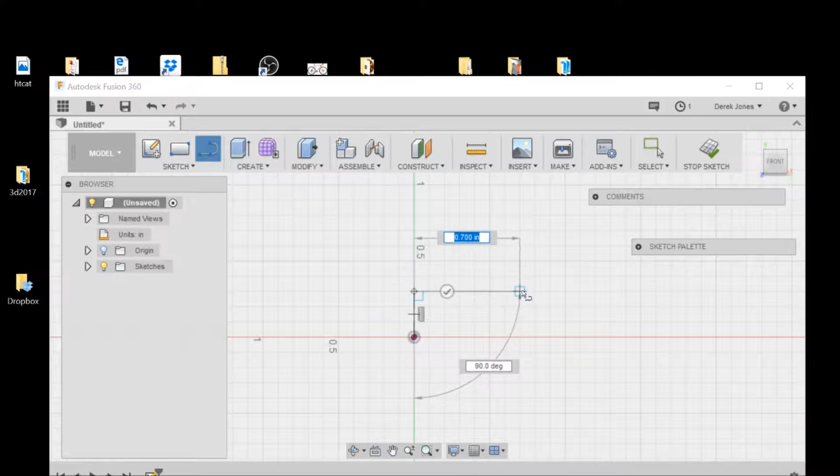What I'm going to do is draw some lines, and we're going to work on the front plane. The first line I'm going to draw is going to be right there, and I'm going to go 300. Then I'm going to come out 0.4 of an inch.

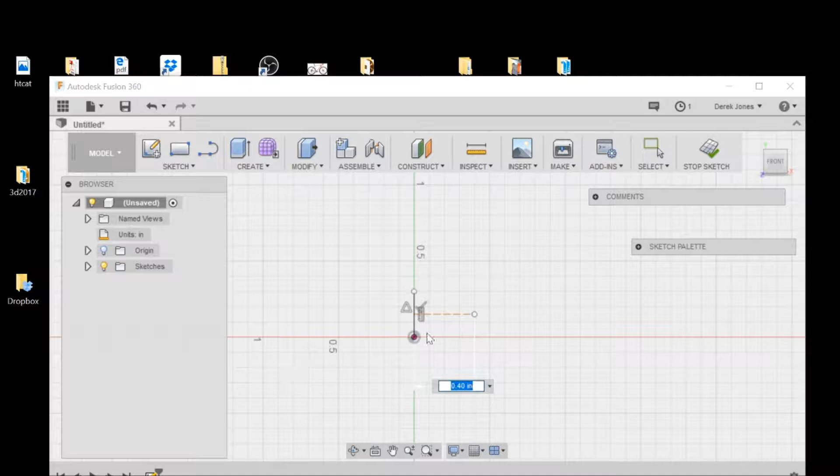What I'm going to do is turn this into a construction line, and that just means it's a measurement line. Then I can go sketch dimension, and I know that it's 0.4. So there's the first thing that I'm going to do.

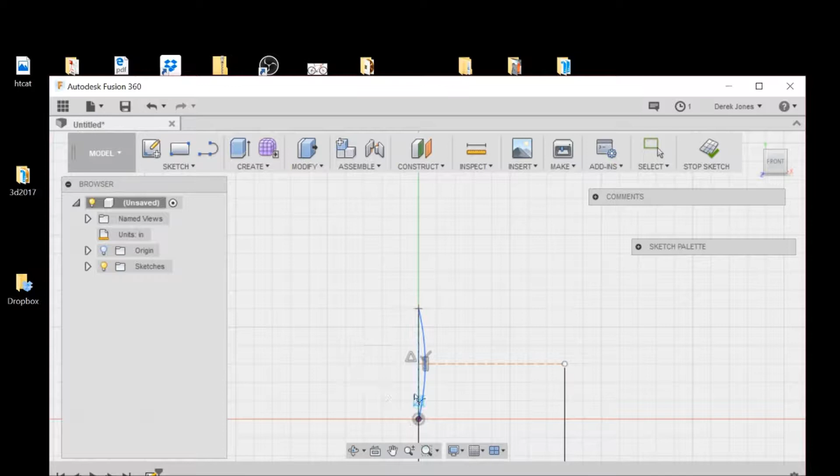Now what I want to do is a 3-point arc, and I'm going to click here and here, and I want this to have just the slightest bevel right there, and you will see why in a minute. I'm going to do it again on this side, but it's going to be a lot wider.

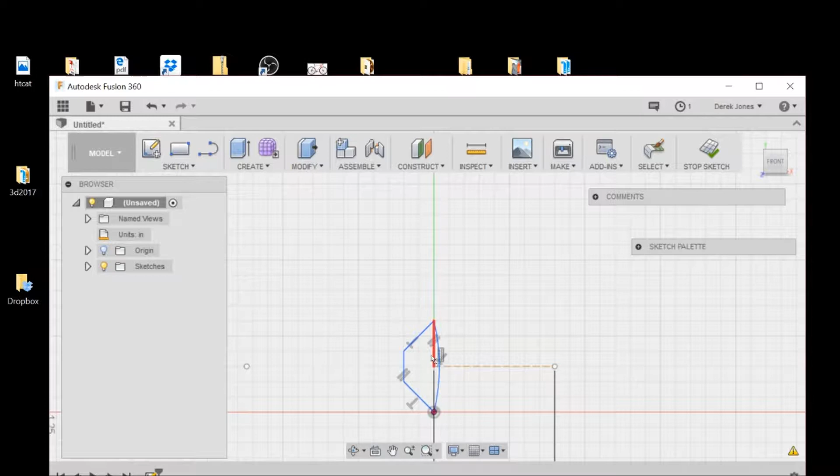Actually, I want to do something different, so I'm going to do a line. You'll see why in just a second. Okay, and then I'm going to come back and trim this line out, and I'm going to sketch another line here, and you will see why in just a second.

So what I've learned when making rings in the past is you've got to have a bevel, or your finger will not come back out.

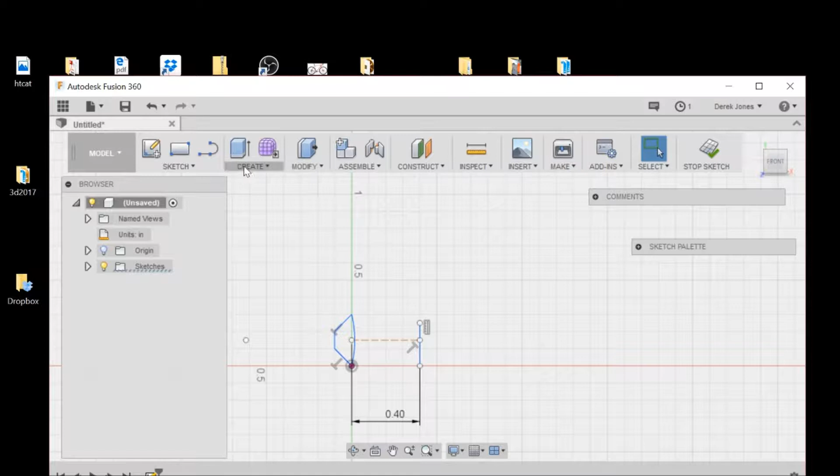So what I want to do now is go to Create, Revolve. I'm going to select this piece as the profile, this piece as the axis. This is a one side new body. Boom. And there is our ring.

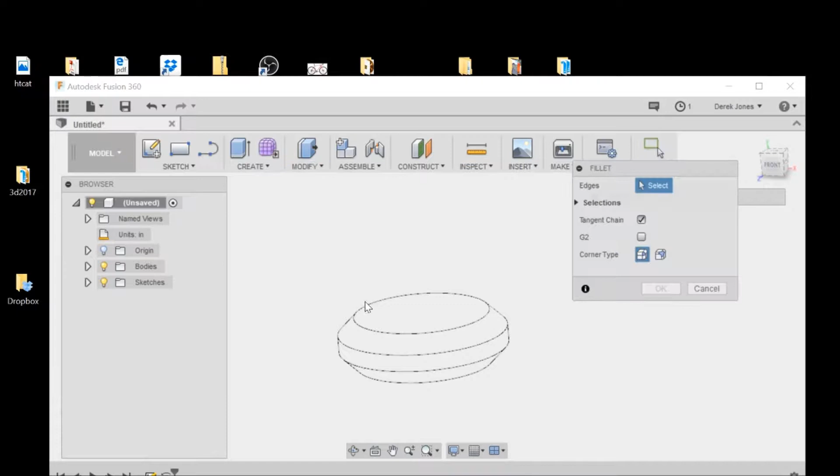Now I don't like these sharp edges, so I want to get rid of those. So I will come back to fillet. I'll click that piece and that piece, and I'm just going to take a little bit off - and that's too much. I don't even want that much, so I'm just going to do 2, and that is perfect right there. That is what I want.

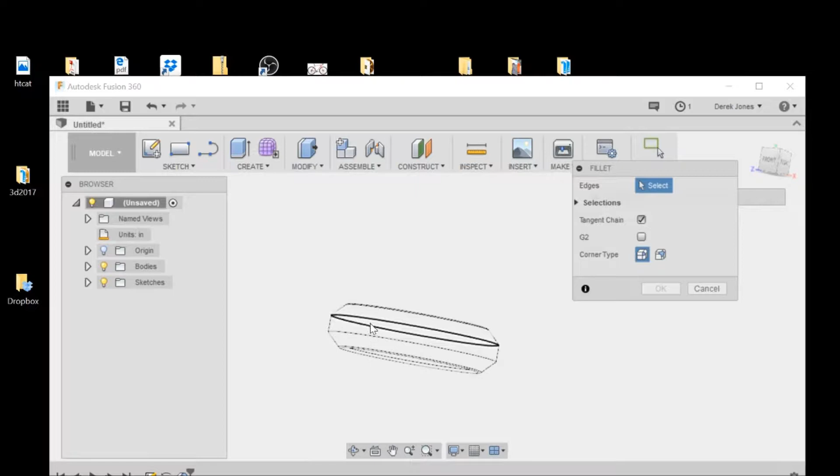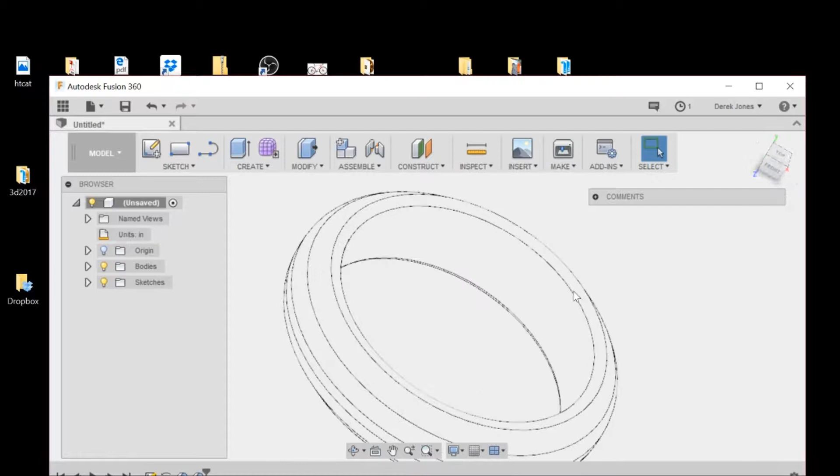And what I'll do now is go to modify physical material, and I'm going to click on metal. Just because I'm not actually working with gold, but it looks cool in gold, I'll scroll down here to gold. I'll drag this over here. Then I'll close this, and we will go to render.

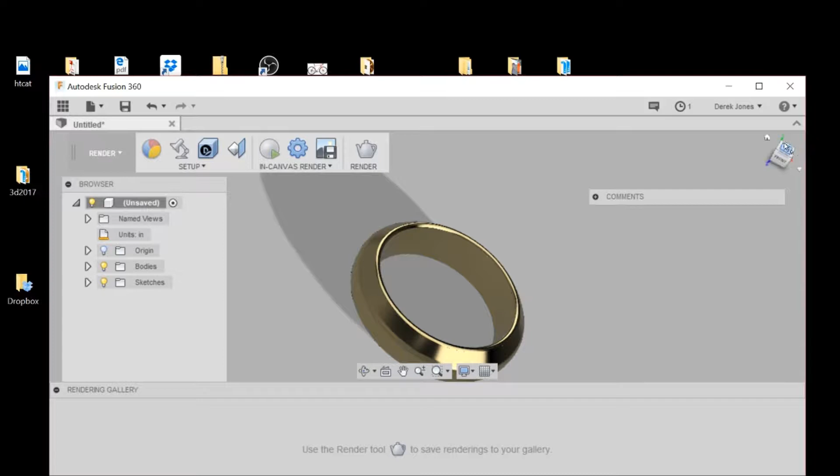And this will show us what our ring - this is what the mold is going to be built around. So let's go back to model now and go to the top, and we'll bring it back to its regular orientation. If you want to look at it from the home view, it's a very good looking blank. So I'll rotate this back around.

Now what I've got to do is go to right click, new component, new component. And from bodies, I want to go create component from bodies. So this body, the third one that I should have done first, is the actual ring, so we're going to name that one ring. Then we're going to click on this one - it's going to be bottom. And this one's going to be top. So we've got three components.

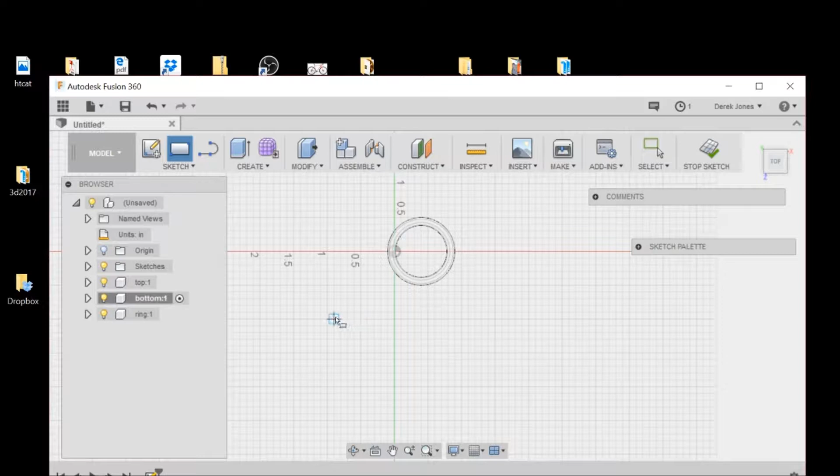Okay, now for the bottom is what we're going to work with next. I want to go sketch, rectangle, 2-point rectangle. I'm going to work from the bottom plane. And I want some room, so I'm going to go about here, and I'm just going to try to make it fairly equal - 2 by 3. Let's do it.

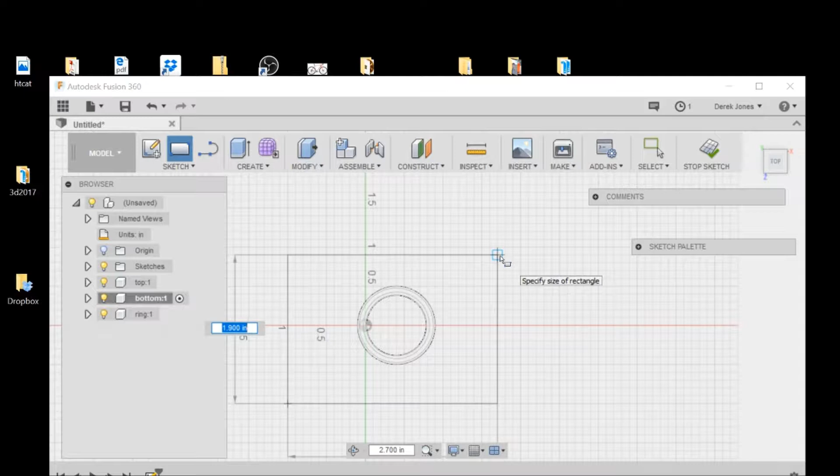That should do it right there. Okay, so this you can see is underneath our ring, and we're working from the bottom.

So now I want to go to modify, I'm going to press pull. I want to go negative 25, or let's just go negative 30. That gives us some room to work with.

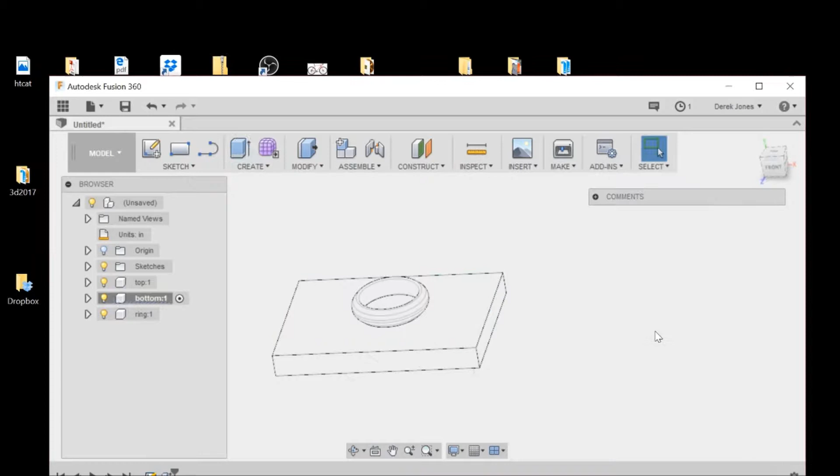So there's that one. And then I want to go to press pull this side, and I'm going to bring this up 0.15. So that's halfway of our 0.3 ring.

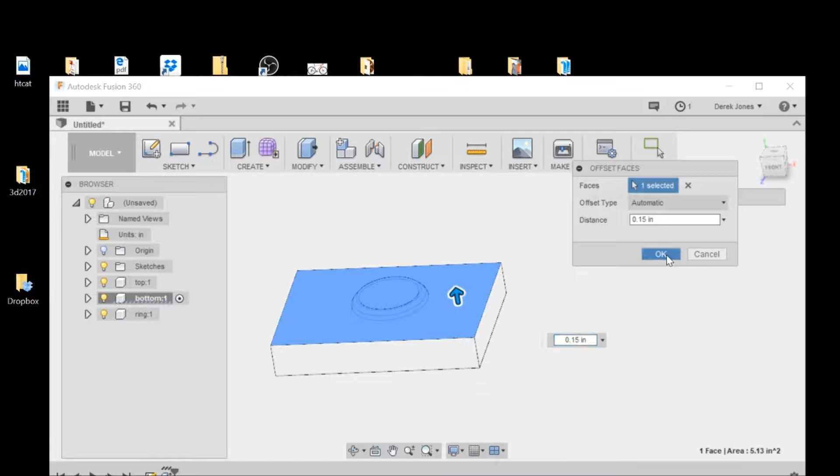So we'll hit OK, and there we have a bottom mold.

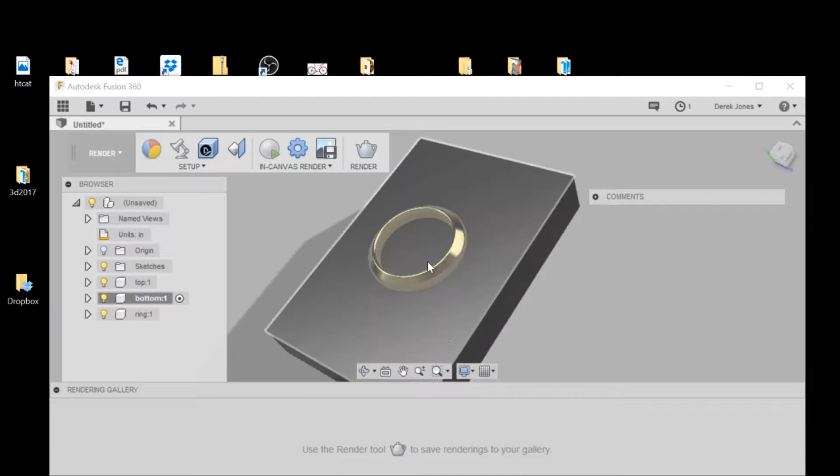Now, there's two ways I can do this. I'll show you what I think is the easiest way, and then we can go from there. If we render, you will see the ring is sitting halfway in this mold. It looks like something from Lord of the Rings or I don't know. But anyway, we'll go back to model.

Okay, so now I want to go to top, and I'm just going to draw these out first. Go to sketch, rectangle 2-point.

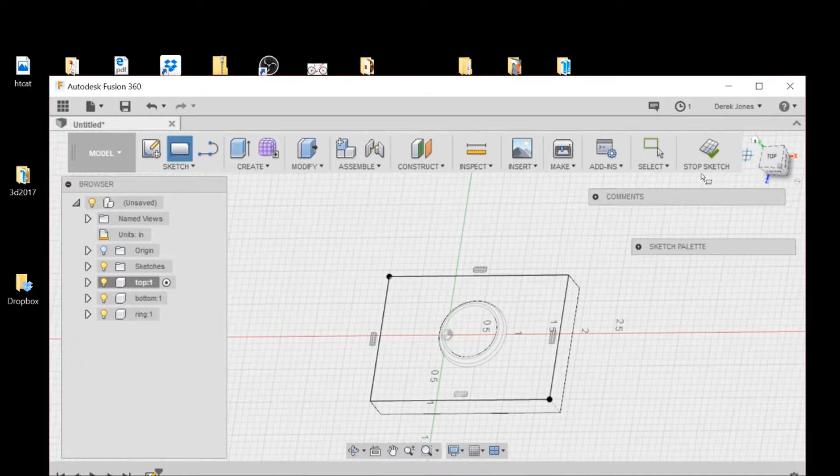I'm going to click on the face of the bottom, drag the corner, going to match the distance, the size, length and width of the other one. Go to modify, press pull, and I'm going to bring this up 0.45.

That gives it roughly equal mold size and enough strength to do what we're doing.

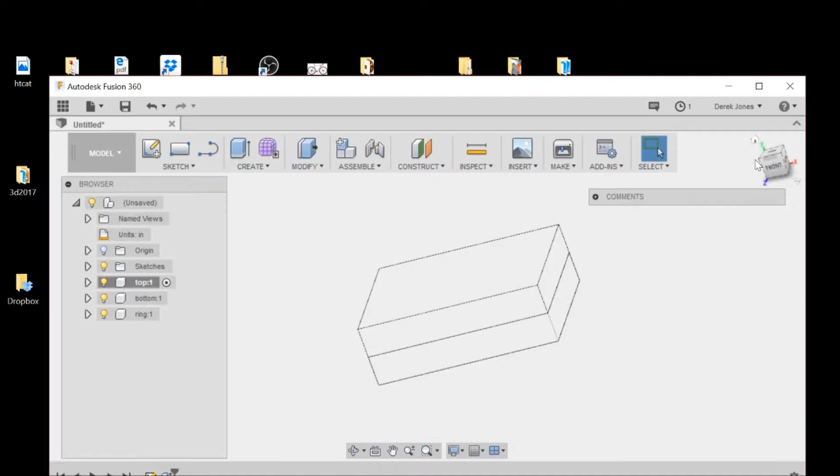Okay. So now, before we get too crazy, what I want to do is come back to the top, and I'm going to add some pressure retaining holes.

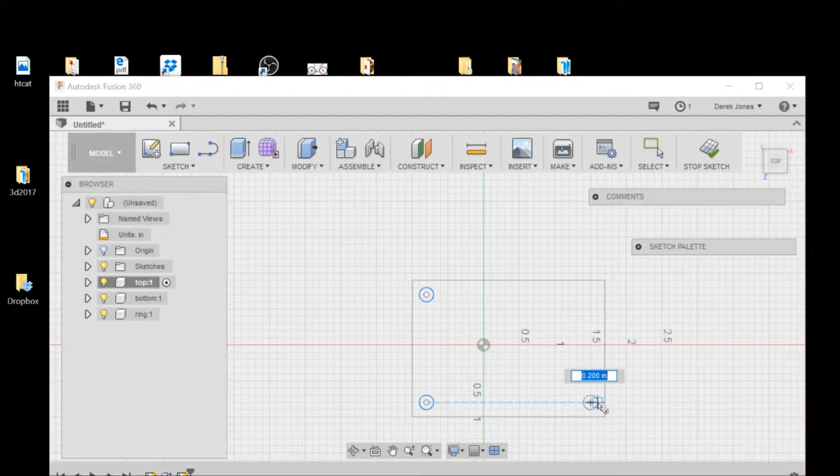200, 200, 200, 200. And I want to modify, press pull this one, this one, this one, and this one.

And what these are going to do is allow us to clamp the mold shut, and this will help us keep the cavity. All right, so we've got our holes all the way through now.

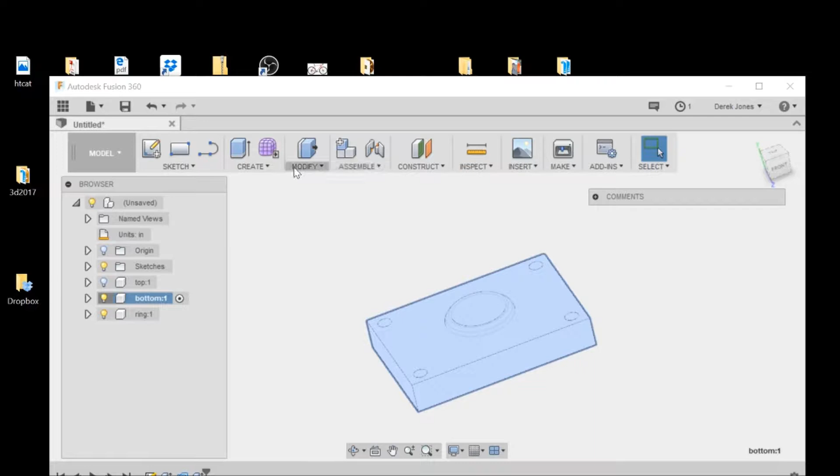Let's get rid of the top for a second, okay? And we're going to go back to the bottom. Now, what we want to do is go to modify, combine.

The target body is the bottom piece. The tool body is the actual ring itself. We do not want to join. We want to cut, and we want to keep components, keep tools.

Okay, so we'll hit OK. We want to keep tools, so we'll hit OK. Now, if we blank out the ring,

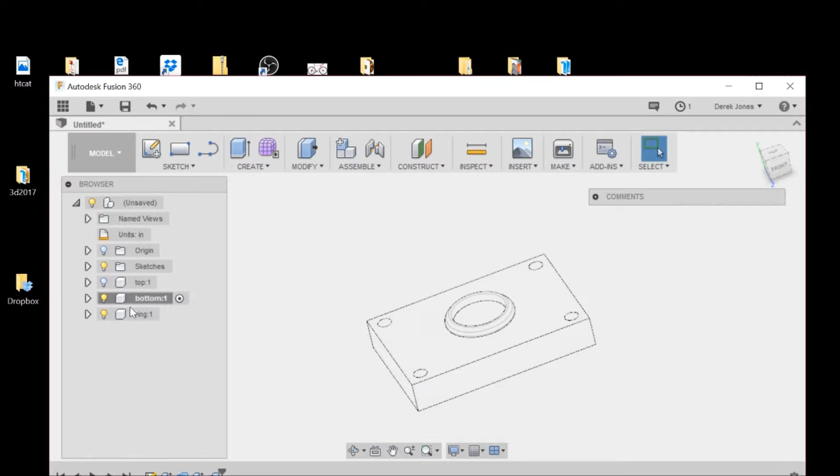You can now see the cavity that the ring is supposed to go in. So there is the actual ring blank itself, and we could actually just copy this whole piece, reverse it, and slap it around. But I'm not going to do that.

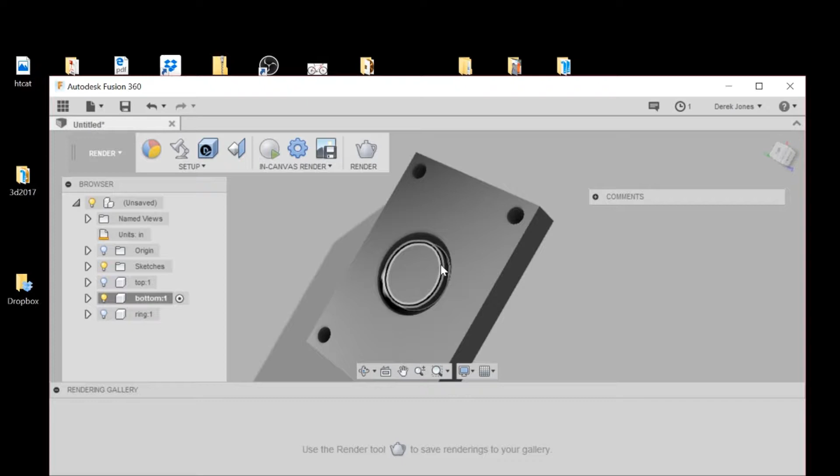I'll do this the long way, and then you can always watch another tutorial and figure out how to copy and paste. I'll have one of those shortly.

Let's go to the top. We're going to blank out the bottom. We're going to bring the ring back, and we're going to bring the top back.

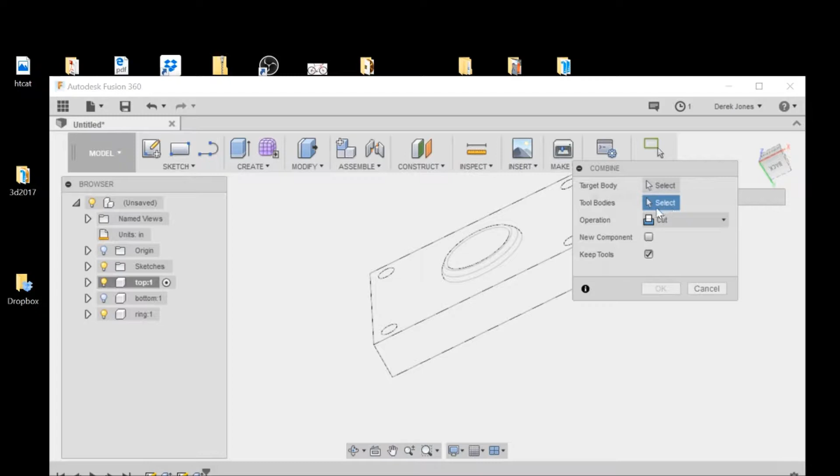And we're going to go to Model, Modify, Combine. Tool body is this. Target body is the mold itself. We're going to cut, keep tools, and boom. Blank out the ring, and we've got a second half of our mold.

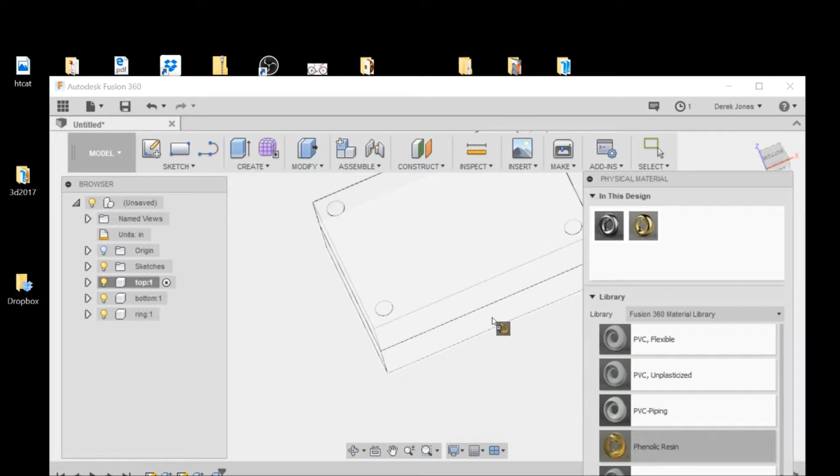All right, so now if we click this all on, we can go to Modify, Physical Materials, and what I want to do is go to Plastic, okay? And the reason why is it's easier to look at this if you make it transparent, and I like this phenolic resin, just resin for short.

If you go to Render, you can see the two halves of your mold and the gold ring inside. Now, when I print this in 3D, it is not going to be transparent, but you get the concept of what you're working with. This makes it easier to actually draw.

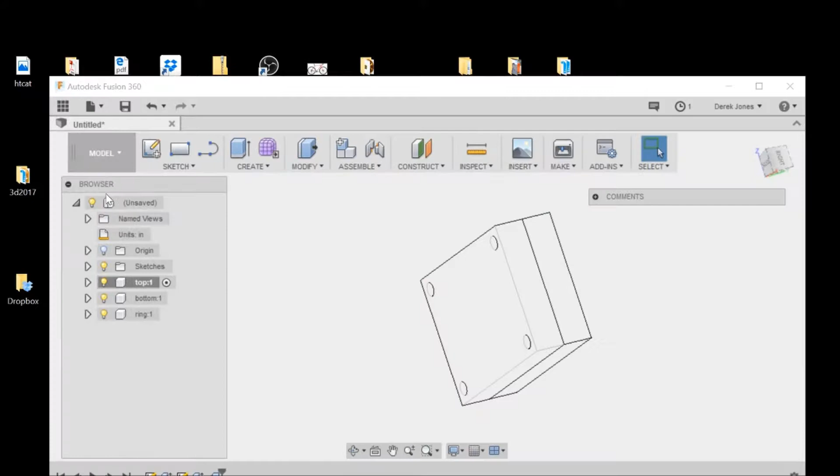So we'll go back to model now, and now what we need to do is we need to blank out the top and come back to the bottom side. Now, it's important to put mounting lugs on this piece.

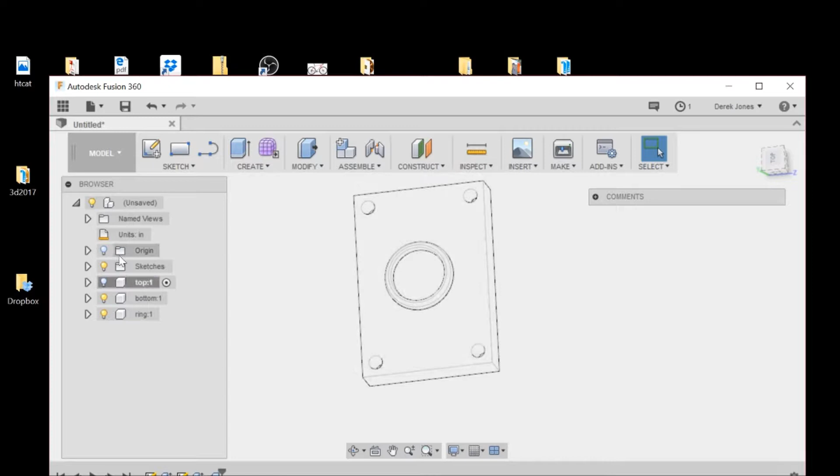So what we want to do is we want to go to sketch, circle, center diameter, and normally what you want is equal space. That is not what you want with a mold. You want this mold only to work one way so that it can't be screwed up.

So we do that by doing a 200 here, 400 there, and maybe another 283 there.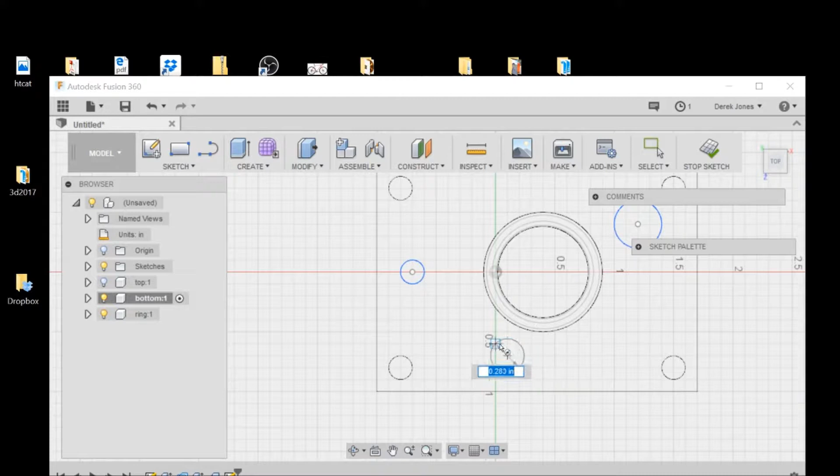Okay. And now what we're going to do is we're going to modify, press pull. We're going to do this one, this one, this one, and we're going to bring those out 0.125, just 1/8 of an inch.

And now what I want to do is I want to bring the top back, and we're going to go back through that same thing. We're going to modify, combine.

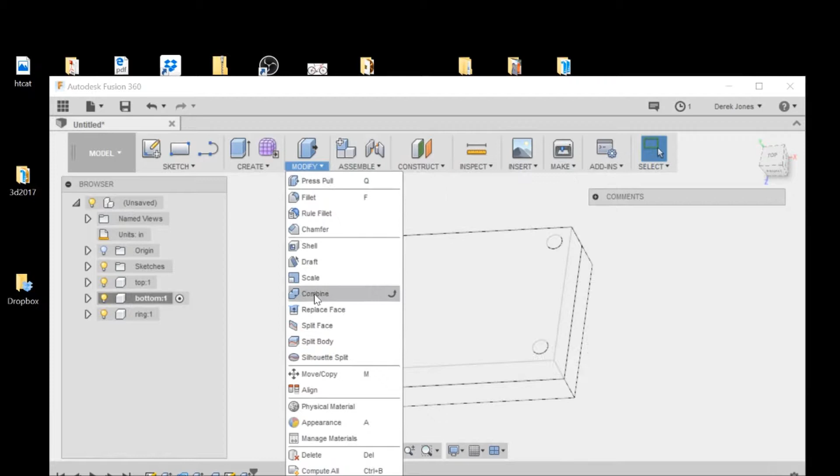The tool body is the bottom. The target body is the top. We want to cut, keep tools, and boom.

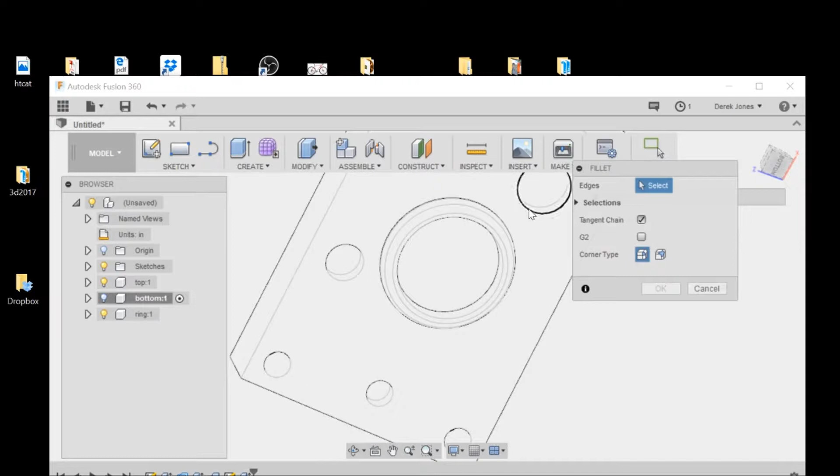We'll come back, we'll blank out the bottom, and you can see that we've cut mounting holes in here. Now, for ease of putting together, I'm just going to put a fillet on these outer edges of 0.2. And let's go 0.4. And all that's going to do is let us put these pieces in a little bit easier. So now on the bottom, I want to do the same thing, but on its mounting pieces.

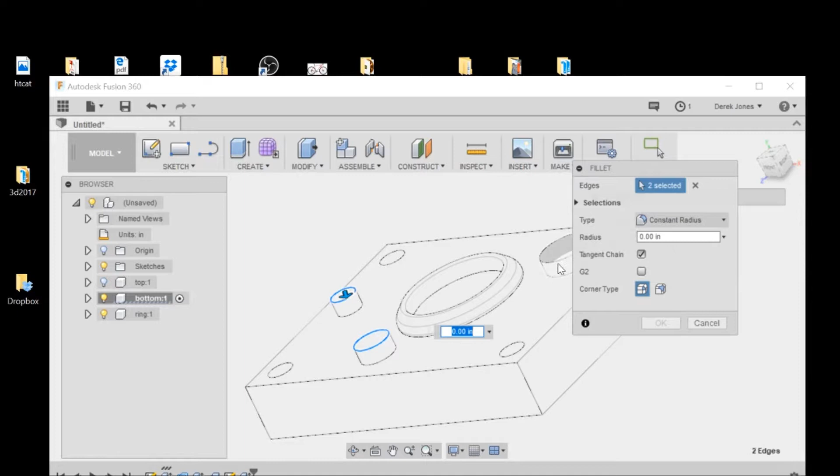And this is just for 3D printing. If you were going to machine this, you probably wouldn't need to worry, but the tolerances for printing are not as good. So this just helps those pieces pop together. You still have plenty of meat to actually line them up. It's just easier to get them in place. So let's bring this back and let's go to render. And we'll look at it again.

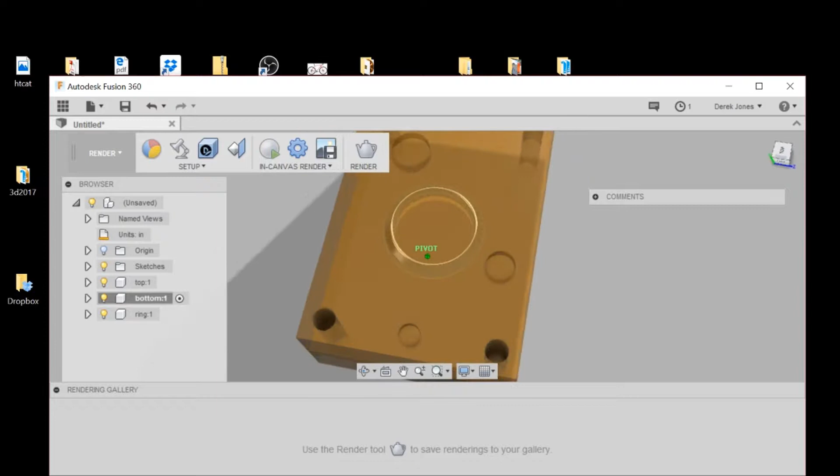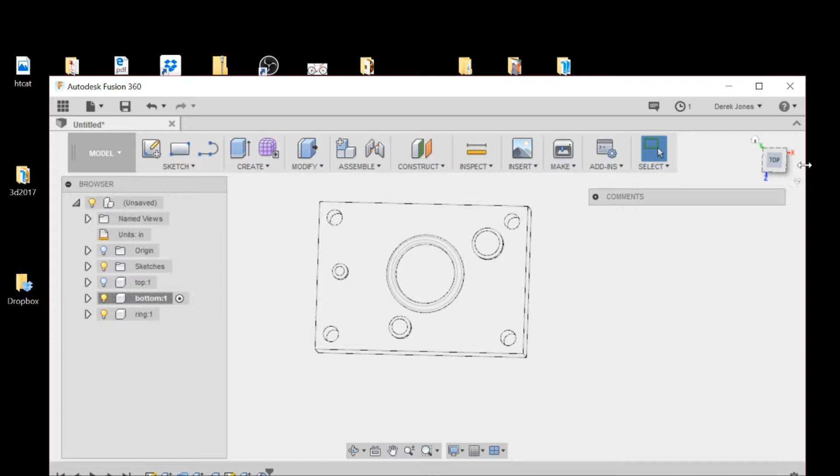So now you can see that we've got the mounting holes, we've got the clamping holes, but we need a way to pour the product into this. Okay, so let's go back to model now, and we're going to get rid of the top. So we're looking at the bottom part of the mold. Now, my experience has been that you want a very large pouring chamber to get a lot of product into the mold fast. So what I want to do now is I'm going to bring the top back.

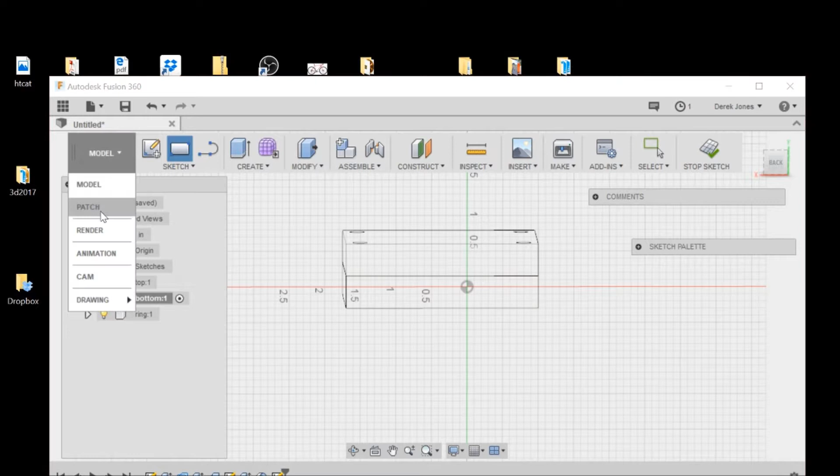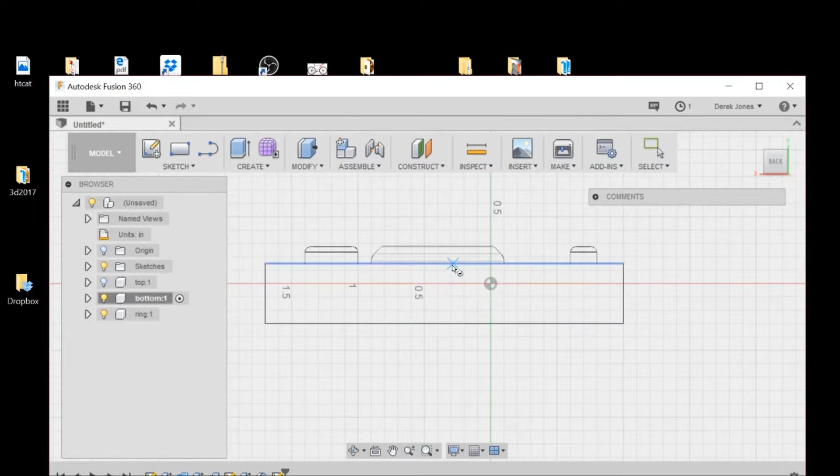I am going to sketch a rectangle, 2-point rectangle, and it's going to go, let's see, gotta look at this, make sure I'm not cutting through any of my lugs. I'm not. Totally safe. Go back to model. So what I want to do is I want to blank out the top, and I know that my ring is roughly in the center here. I'm going to go to sketch, circle, center diameter. I'm going to select this piece right here, go to the center of the ring. I want this to be a good sized chamber.

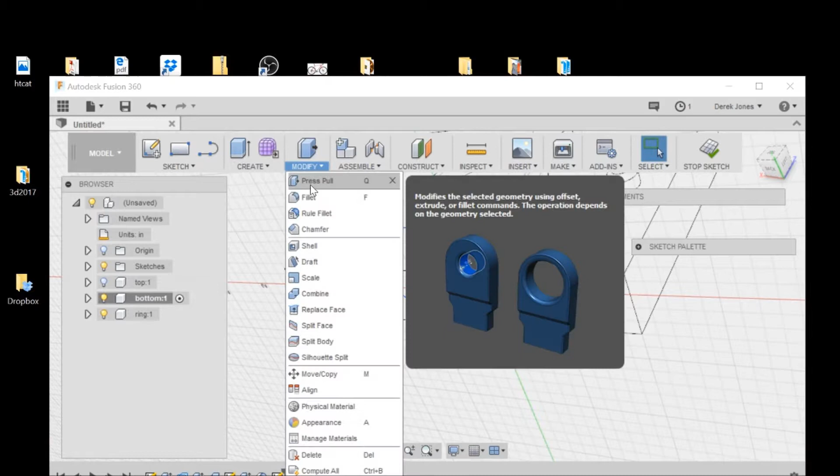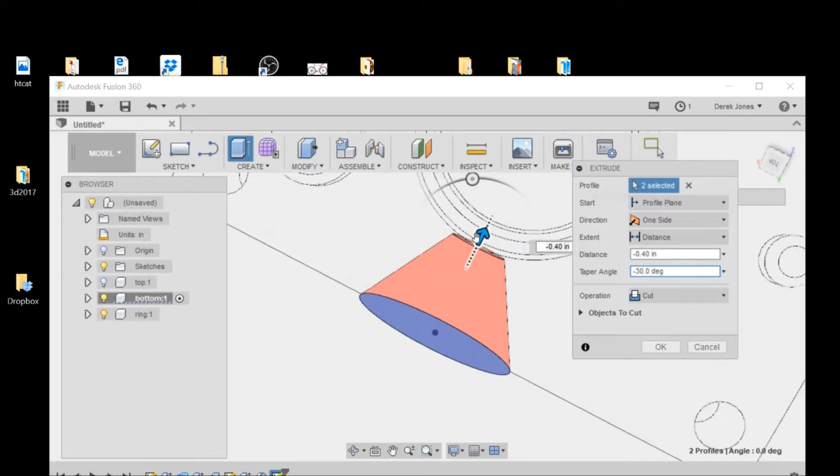And now what I want to go to is modify, press pull. I'm going to click on, I don't want that. Oh, it went to fillet. Modify, press pull, this piece, and we're going to go down and we're going to put an angle of -20 on the taper. And what that does is that gives us a contact with the ring. Not quite enough. Let's go to -25. Let's go to -30. And then I am just going to drag this into the ring cavity itself. Okay? And then I'm going to bring the top back and I'm going to cut.

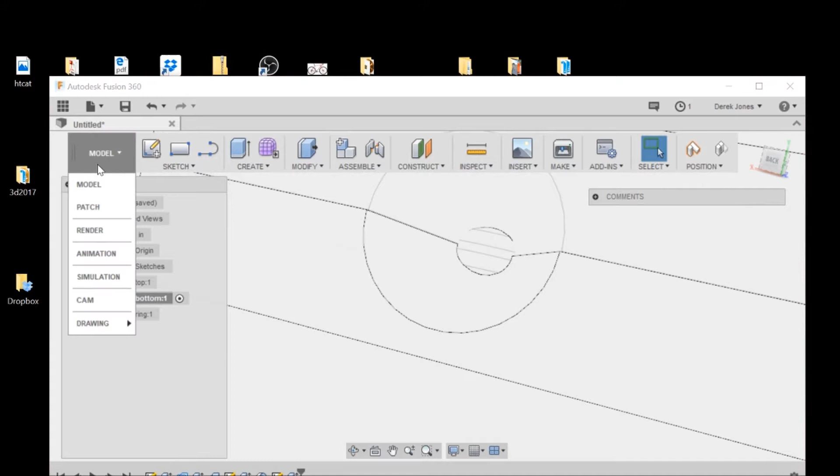Now if I look in the hole here, I can see that it's going to pour into the ring cavity. So now if we go back to model and render, you can see we have a nice pour chamber that'll give us a decent sprue to help get this piece out. Okay? And that's why we've done that. And so, all right, that's only part of this. Now we actually need to put some vent holes in so that we can get the ring out and get all the product into the ring and make a decent mold.

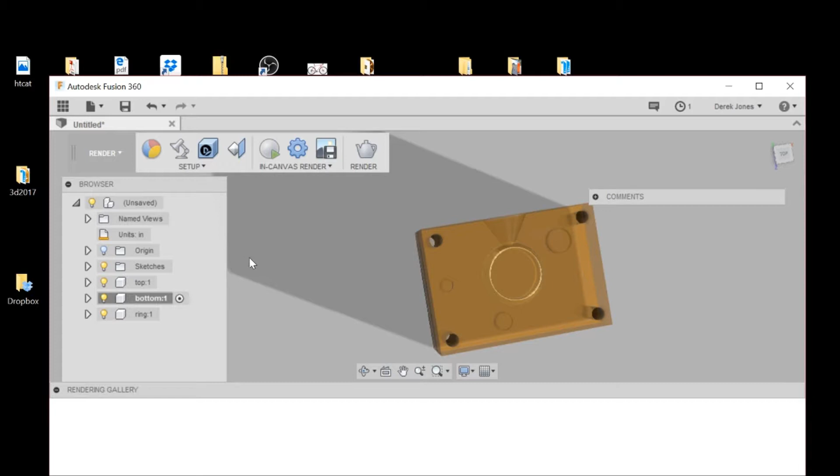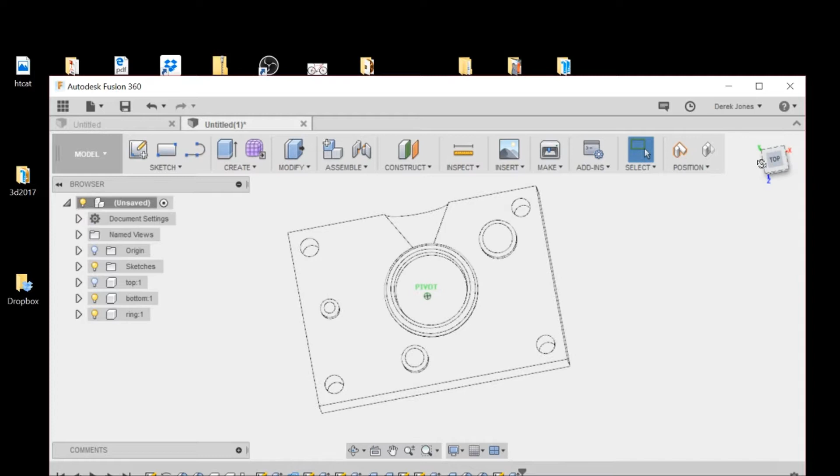Okay, so now what we want to do is we want to put some vent holes that will allow the molten wax to push the air out so that you get a full fill. And so we want to blank out the top view. We're looking at this from a bottom. And the easy way to do this, in my opinion, is to do a new component, and we're going to put this as vents.

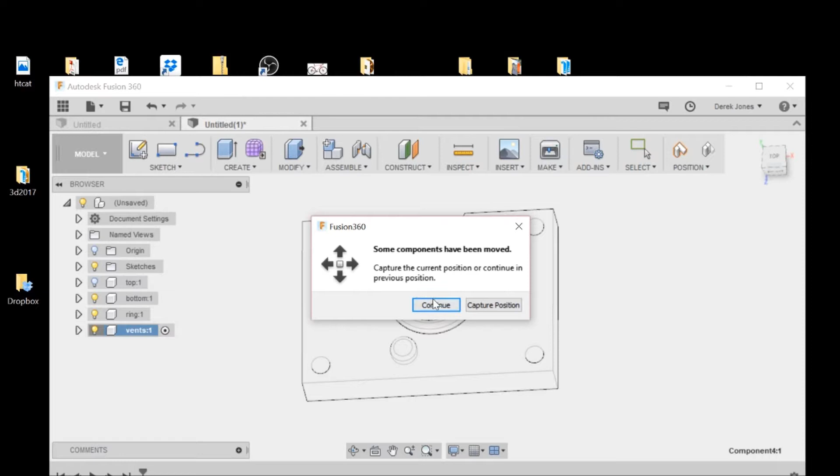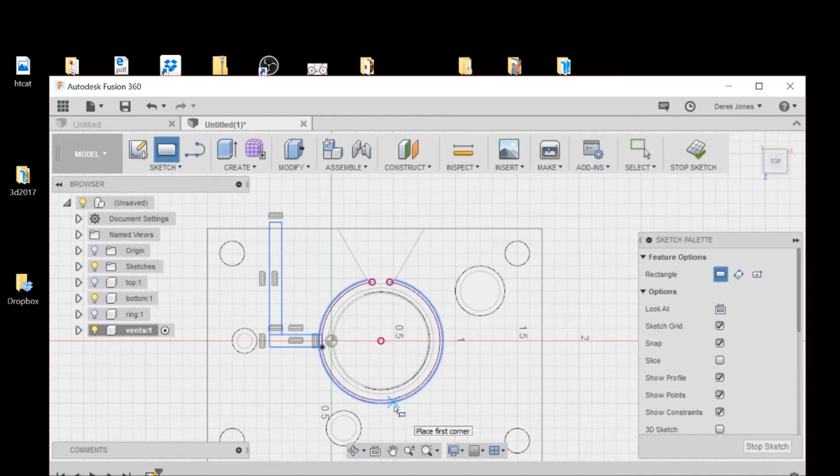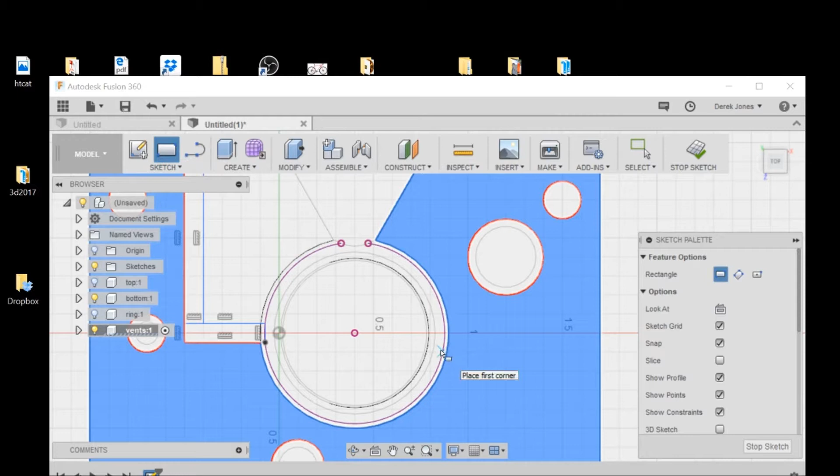Okay. All right. Now, what we want to do is we want to take a sketch. We want to do a rectangle, 2-point, continue. We're going to do on the face here. Okay. We're going to blank out the ring. We're just going to slightly overlap. And then we will do that. And that, and maybe one more right there. Okay. And now all we're going to do is we're going to modify, press pull this piece, that piece,

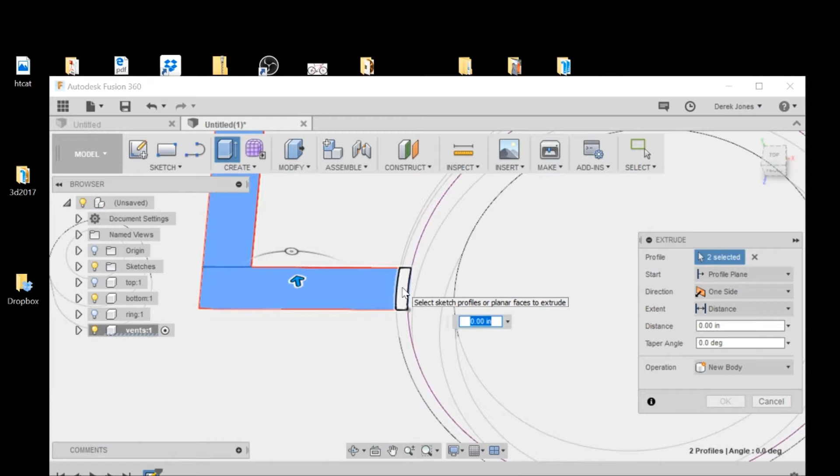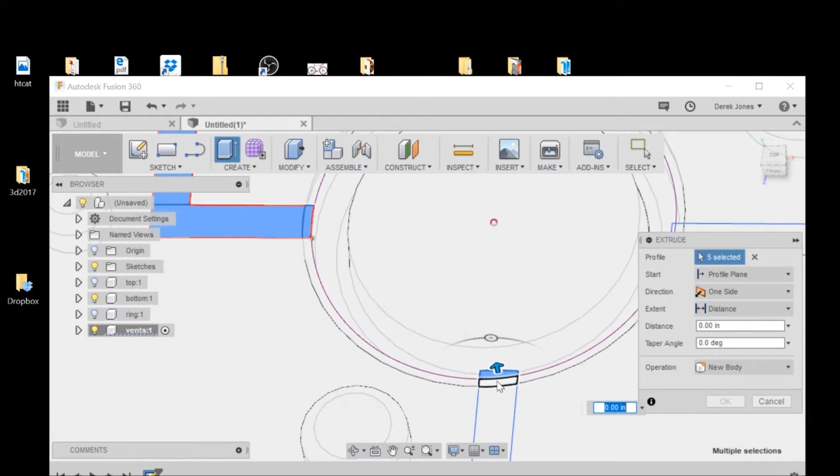that, and that. Okay. And now we're going to modify, press pull. I just did this. Do it again because I did it wrong. This. And Fusion 360 is great because it's really forgiving. And we're going to take this down 0.2. Oh, we didn't do it right. We should have cut it. Again, I made another mistake.

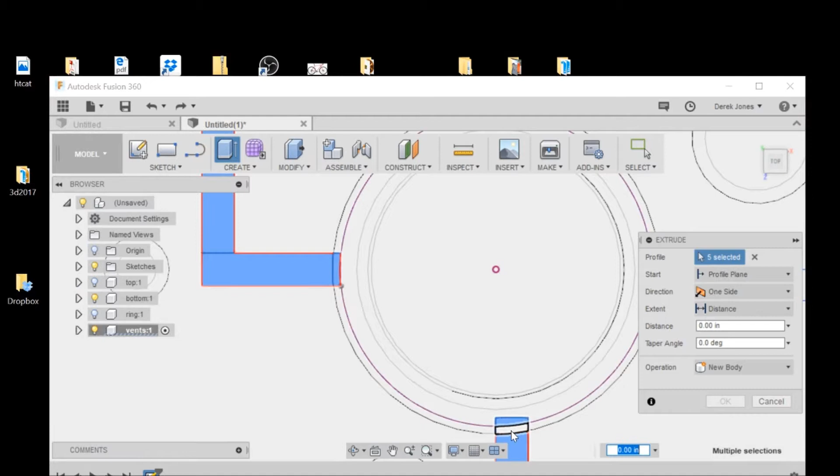So what I'm going to do now is I'm going to go modify, press pull. This piece, this piece, this piece. I need to cut here, here and here, here, here and here. And I want this to cut.

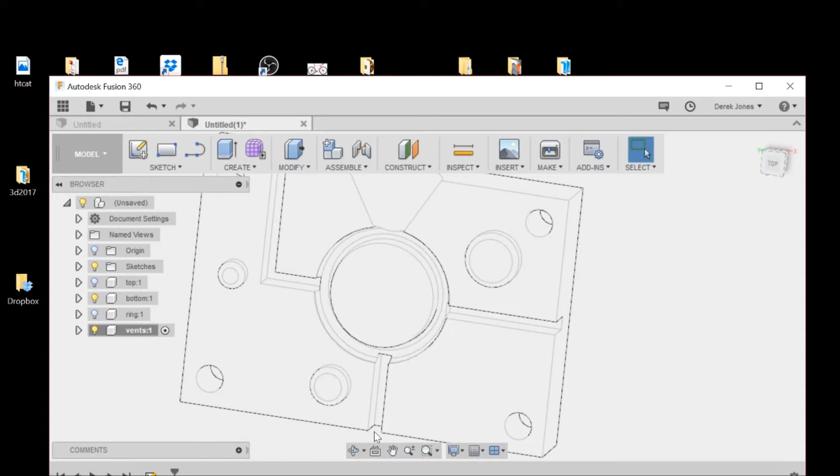And I'm going to go down pretty far. All right, now if we look at this, you have these 3 big holes. And all this is going to do is allow wax to flow and pour evenly. And I know this bottom one looks weird, but trust me, by the time the wax hits the bottom, it plugs real fast. So let's fillet this to make it a little easier to get the mold out.

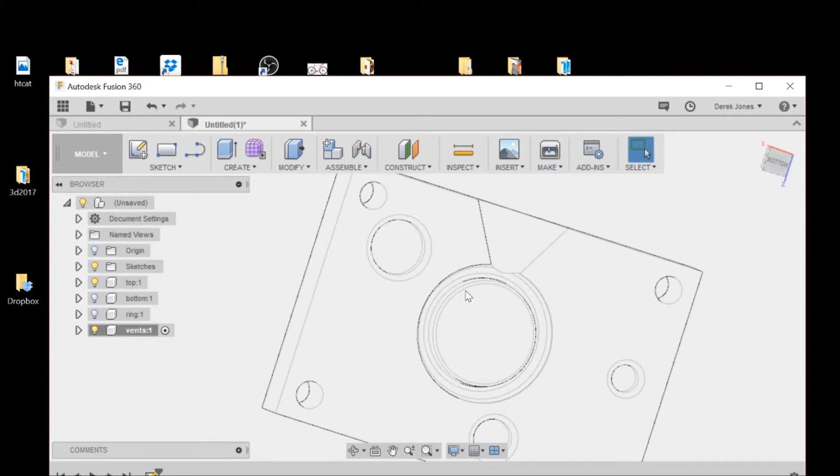Let's go get rid of the bottom and go to the top. Do the same thing on this side. Modify, fillet, 0.02. Okay. And I wonder, I probably can make this edge right here. Yeah, that's good enough. It's good enough for what I'm going to do.

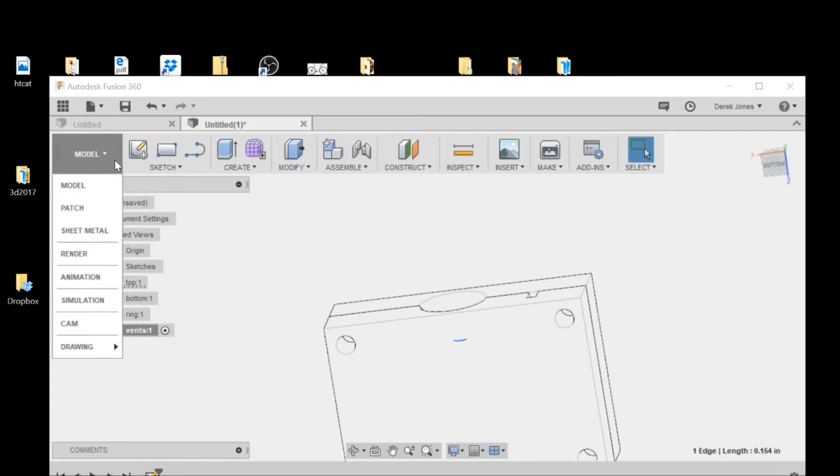Okay, so if we bring everything back now and we go to render, you can see that what we've got is a mold with 4 screw holes to clamp it shut. We've got 3 alignment hole pin dowels, whatever you want to call them. If you get rid of the ring, you have a cavity, a pour chamber with several vents.

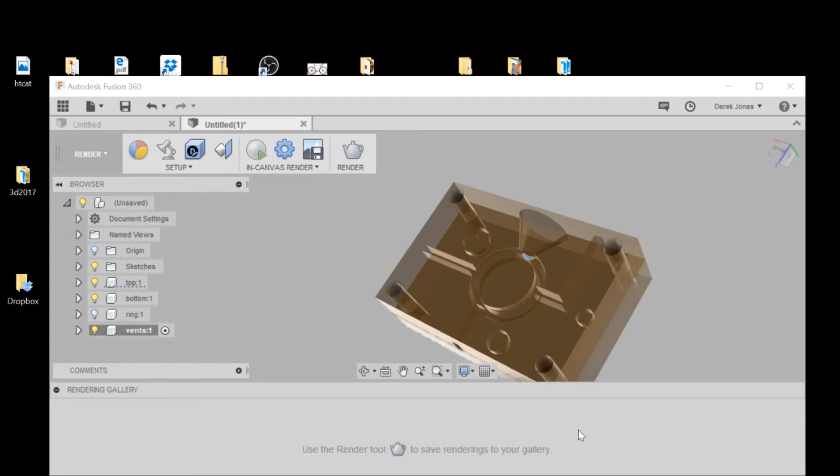So now what I'm going to do is I'm actually going to go print this, and you'll see just how easy it is to actually produce a wax ring. I don't have the right casting wax here today, but this should work for what we were trying to do today. So bear with me, and we'll get ready to do that.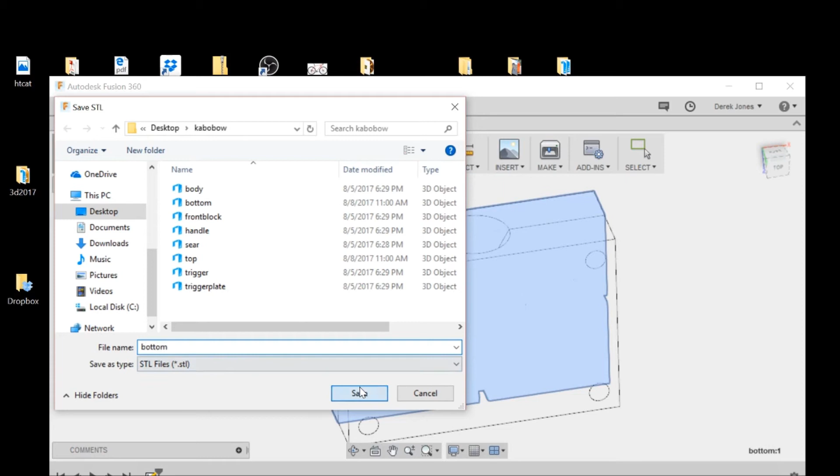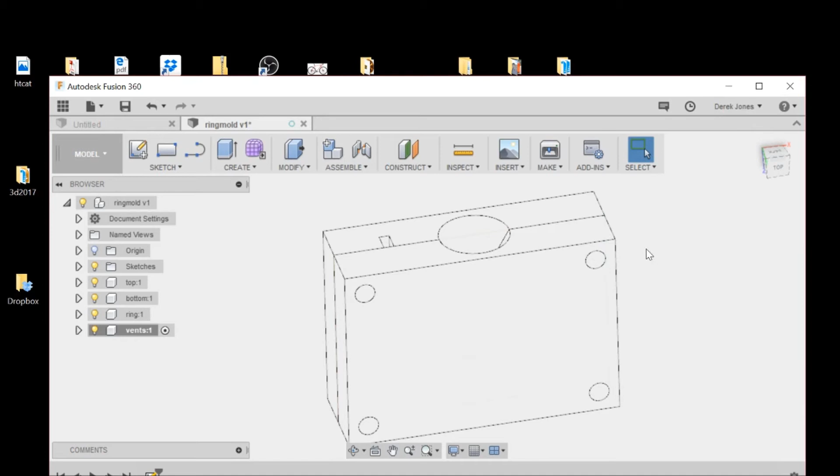So that's the bottom. And I want to replace it because I did this earlier and it didn't work. So I'm just going to replace it. And then I'm going to do top. And the same thing. Save as an STL, binary, high. It's going to go in kabobow, and I'm going to replace top, save, and I want to replace it. Okay, so now I have the copies of both sides of this in my file. So now I'll move it to my 3D printer. So let me 3D print this and we'll give it a shot. So hold on just a second.

Okay, so I printed it out on my XYZ printer. I even made a mistake and printed at a slight angle, and it turned out just fine, even though it had to build a weird raft. That was kind of a good test for the printer. You can see that with just a little fitting, it matched up pretty good. I could use screws on this, but I'm actually just going to clamp it and see how that does. So we're just going to pour candle wax in it and see how it works.

And I designed this to use screws, but for just now I'm going to clamp it because it's really fast. So now I'm going to pour this and see how it goes. And I really can't pour and take video at the same time, so you'll have to let me do this, then I'll bring it right back. So I found that pouring temperature is just as important as it is with anything else. I got the wax molten, but I'm going to just let it cool a touch so that it doesn't run like water. So I'm letting it thicken up just a touch.

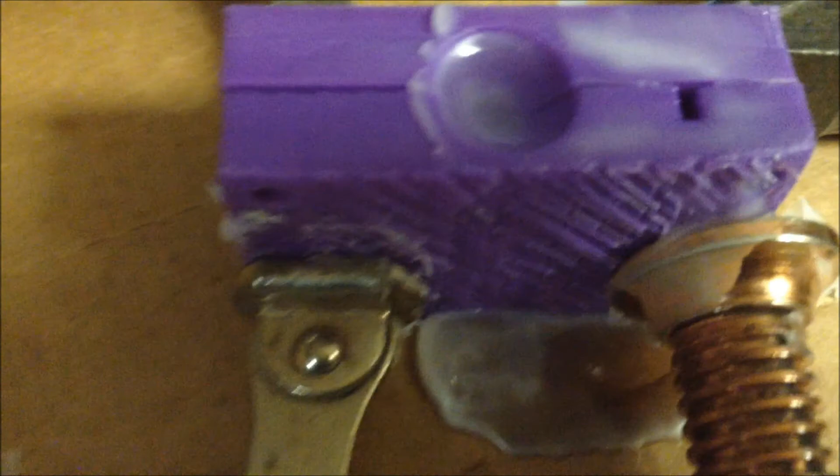Alright, so I poured it, and none too accurately, might I add. And again, this is just cheap candle wax. This isn't even modeling wax, but I've got the cavity filled, so we will see how it turns out here in just a second. Okay, so there is the molded ring, and there's an air bubble, but nothing I can't pinch. Like I said, this is more of a blank than anything, so it definitely works.

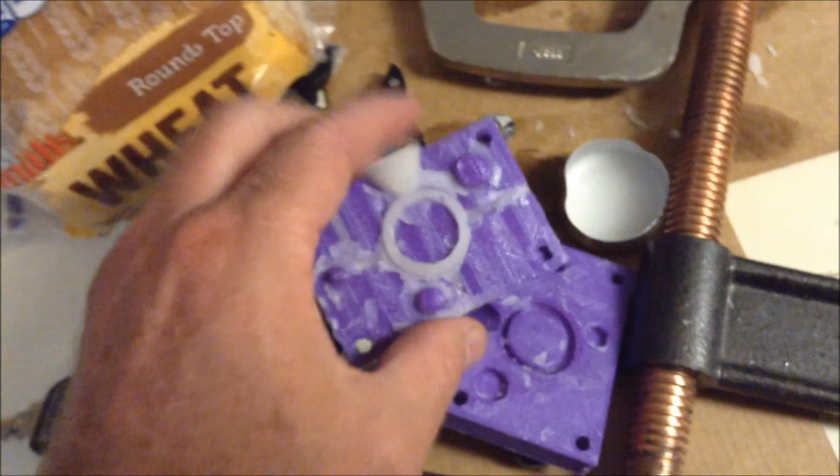And like I said, this is just candle wax. If you got some real casting wax and spent some time, the one thing that you could do is you could acetone treat your mold to take the ridges out of the equation, and that might make releasing the product a little easier. I have to be very careful to pop these out.